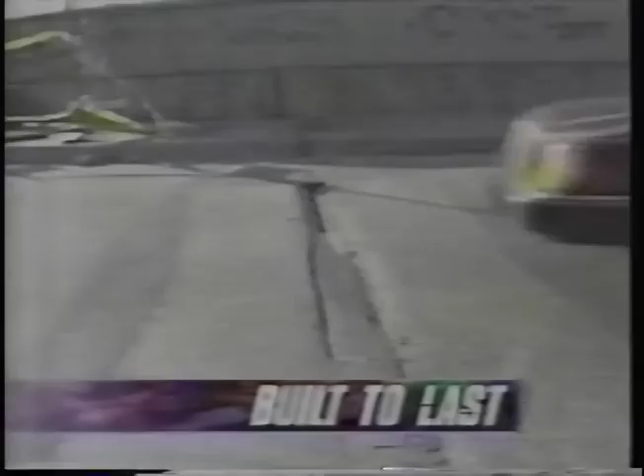Roads and pavements, bridges and support columns. All of what's called America's infrastructure is slowly crumbling because what it's made of does not last. This is ordinary concrete, and this is what happens to it after years of punishment. It falls apart. Most of the concrete in the nation's highways and bridges has a life of just 30 years.

What's the solution? I'm standing on it - brand new stuff called high-performance concrete. This is a sample. Engineers say this will last not 20 or 30 years, but 100 years, maybe longer. This is what America's roads and bridges could be made of in the future. Engineers at the New York State Department of Transportation discovered how to make it 2.5 years ago. We were surprised when we actually did all the calculations and got the test results back and said, my goodness, this really is going to work.

Researchers stumbled on the formula after the Clean Air Act forced power plants to reduce pollution. Huge quantities of industrial waste called fly ash began piling up, collected from smokestacks. At first used as a filler in cement, it turned out to be a key ingredient in strengthening it. So this is 1/4 industrial waste. But it makes the cement many times tougher. That's right - high-performance concrete is 74% cement, 20% fly ash, and 6% microsilica, another type of ash, all mixed with water.

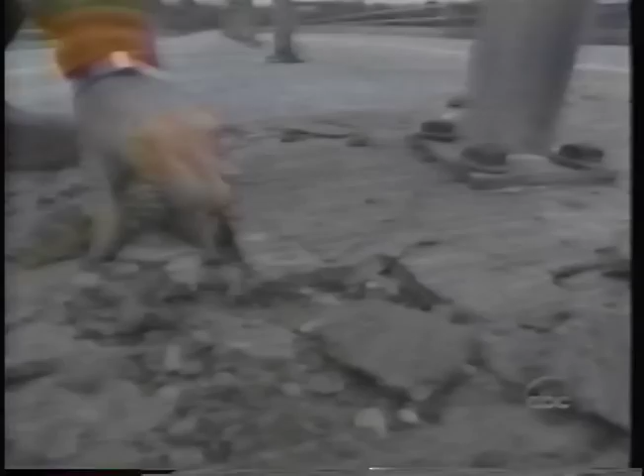When it dries, ordinary cement is actually porous, not solid. That's how salt and water get in. But the fly ash and microsilica are 10 to 100 times finer than talcum powder. Professor Ken Hover of Cornell has found they literally fill in the microscopic holes in the cement, and demonstrates it with colored tennis balls.

So the next thing I would want to do if I want to densify this box is get some mid-sized particles and try and get those into the box. They fill in all the smaller voids in between the cement particles, and we just have a very, very dense material. More waterproof? Correct. Stronger? Yep. Lasts longer? Yes. The new concrete is 3 times more water resistant, 20 times less likely to form cracks, and in pressure tests measured 9,060 psi - almost 20% stronger than regular concrete.

However, modern scientists were not the first to make high-performance concrete. The ancient Romans were, mixing volcanic ash with their cement to make it far tougher. It's one of the reasons the Colosseum and other Roman buildings have lasted so long. We really literally reinvented what our ancestors 2,300 years ago had already done. At least 11 states are following New York's lead. High-performance concrete is more expensive than ordinary concrete, but because it's easier to lay down, it costs about the same to use. Engineers say not only could it be an answer to much of America's infrastructure problems, but it could revolutionize all construction. Jack Smith, ABC News, Albany, New York.

That video was actually recorded February 11th, '97, so 6 years ago. They showed a map that only had a few states that had used high-performance concrete on their bridges. As of last year, all 50 states have used high-performance concrete on their bridges in one way, shape, or form. New York and Ohio were probably the first two to come on board full stream - the fellow at New York, Don Streeter, was saying that they had only come up with it back 2 years before '97, which was '95.

Reality is they did their first overlays and bridges in the mid-80s, likewise Ohio, and then they watched them, monitored them, tested them, looked at them for another 5 to 10 years until they really got the data back. They looked at the numbers and they're really going to work out. They know they're going to get extra life out of these structures.

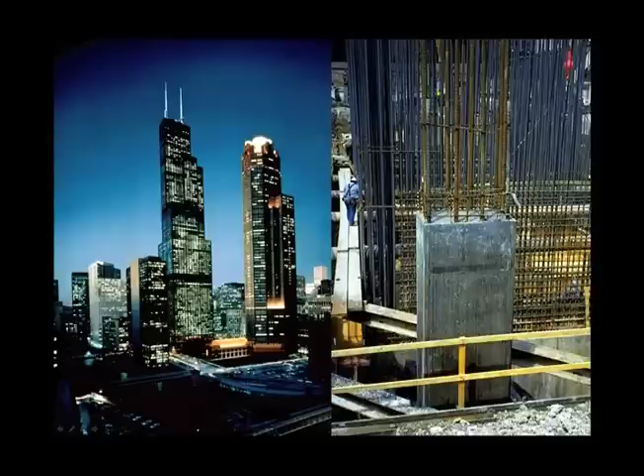If you think about it, it stands to reason: if you were to make a column out of 4,000 PSI concrete to support this weight, the column would become very large to support that mass of dead weight. If you make the column 12,000 PSI with a higher modulus of elasticity, the column can become a lot smaller — not only smaller, but using less steel. And if you've got 20 of these columns going up through the whole building top to bottom, you save 35% square footage on every column times 20.

They lease the building based on square footage. So if you can reduce that column size — if there were no columns, Donald Trump would love it because then he could rent out the whole floor. The idea is to make the columns as small as possible with as high strength as possible, which gives the owner more to rent and lease out, so they make more money off of it.

High strength in Chicago, 12,000 PSI. Right now, Trump Tower is going in at 16,000 PSI concrete. They have a modulus of elasticity requirement - they actually didn't require strength, they required a certain modulus of elasticity out of the concrete so that the building would stay rigid enough. They have an equation where if you live on the top floors, you shouldn't be able to feel the building sway more than about 1 time in 30 years. They go from that measurement back to how strong the concrete has to be in order to keep the building that rigid in the 200-mile-an-hour winds they get in Chicago sometimes at those elevations. So it's a crazy calculation, but they're up around 6.6 million modulus of elasticity, which is really high.

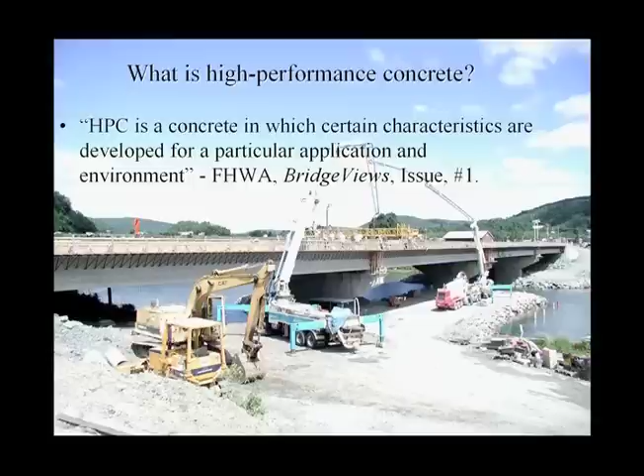That's just one property of high-performance concrete. The FHWA says that high-performance concrete is a concrete in which certain characteristics are developed for a particular application and environment. The operative words there being 'certain characteristics.' Concrete can have a lot of different characteristics.

High strength is one. Right now, in the construction industry, one of the big things in concrete is art concrete, stenciled concrete. You have some pavements out here that are stenciled to make it look like bricks - it's actually concrete, they throw colors on it. You go to some hotels, they'll have the drive areas to look like specialized stones with colors on it. That's actually a high-performance concrete. They're doing something other than making a gray slab on the floor - they're getting something out of that concrete.

Here's a list of what the FHWA says are some of the HPC characteristics. It can be ease of placement - you ever heard of self-consolidating concrete, SCC? That's probably the latest thing in the last 5 or 6 years in the concrete industry. They've got certain chemicals, and silica fume can be used for that application, but they're able to make a concrete that flows like water, but it doesn't separate from the aggregate. The aggregate and the mortar and everything moves in unison.

So, anybody work with concrete? By hand, actually wheelbarrowing it and putting it in, or what type of work? Actual finishing? Okay, you know how heavy it is to pull the concrete around - it's back-breaking work to do.

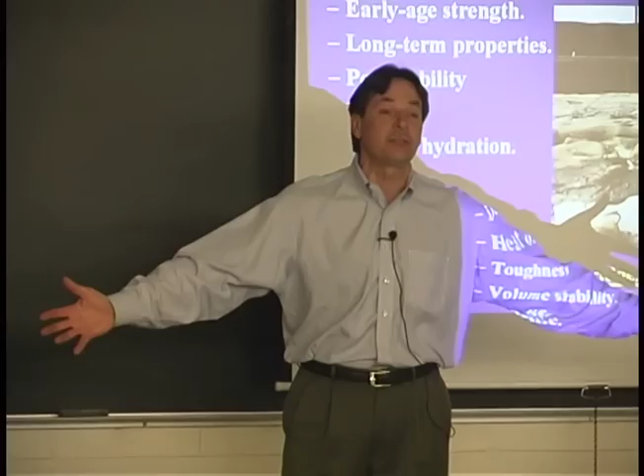SCC concrete, particularly in a precast plant where they're filling up concrete in forms, or even in houses where they're filling up basement walls - SCC concrete, they can place it at one end of the form and let it flow like water to the other end, and the aggregate will stay with the leading edge of the flow. In a precast plant, they've cut labor probably 80% in the last 6 years. They don't have to vibrate the beams, and they get much better finishes on their concrete.

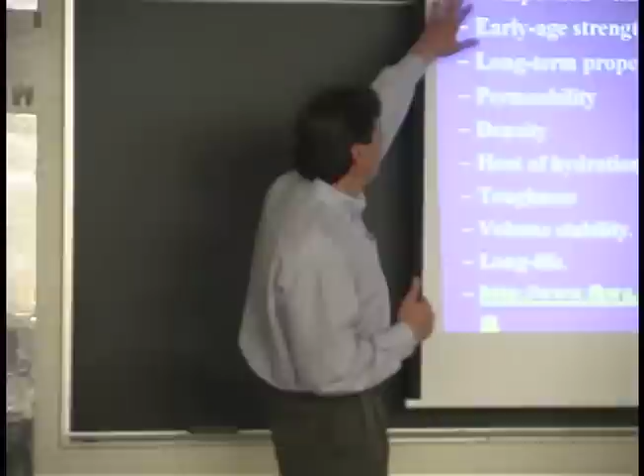But that's just one area of what would be a characteristic for performance. Early age strength - if we wanted to fast track, rebuild an intersection, get on it and off of it in 4 hours' time, you can do that. There's concretes you can tweak that characteristic and make it happen. The idea here is to make engineers think, when we talk about performance, that there's more you can do to concrete besides just achieve strength. Strength is just where everybody's head has been for the last 100 years or so - if a little bit is good, a lot has to be better.

But there's other things that make concrete fail, not just strength. In this case, we're looking at a stilling basin of a dam, that we'll show a little video on here, where the concrete was obviously eroded away by abrasion erosion. That needs a concrete that has extra toughness - that's a performance characteristic that you need that can be improved.

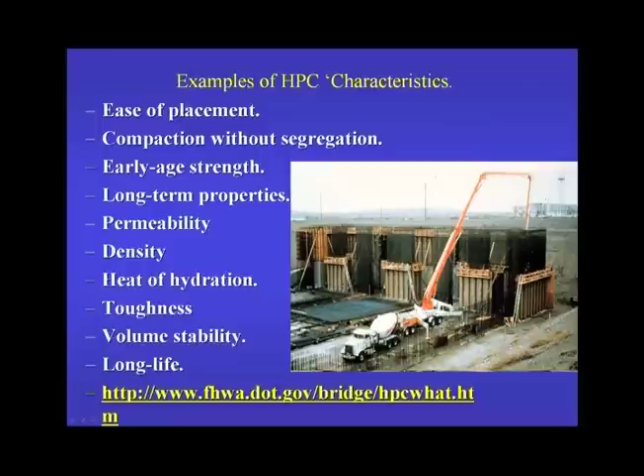If you're making containment vessels for low-level radioactive material - this is the Hanford nuclear site in Richland, Washington, with a 12-foot thick slab or walls of concrete here - they're worried about heat of hydration. When concrete gets hard, changing from its wet state to a hard state, it generates heat as part of the chemical reaction. In that big mass of concrete, in big thick walls like that, concrete can get pretty hot. If you have a core differential temperature from inside that slab to the outside that's greater than 35 degrees F, it'll crack. They obviously don't want this to crack because it's supposed to last a couple hundred years containing radioactive material, so they want it to be very volume stable with low heat of hydration.

They don't want to generate a lot of heat. They want the concrete to still get hard and last for a couple hundred years, but they don't want it to hit 160 degrees when the outside environment's 50. So there's things they can do to the concrete to make that work.

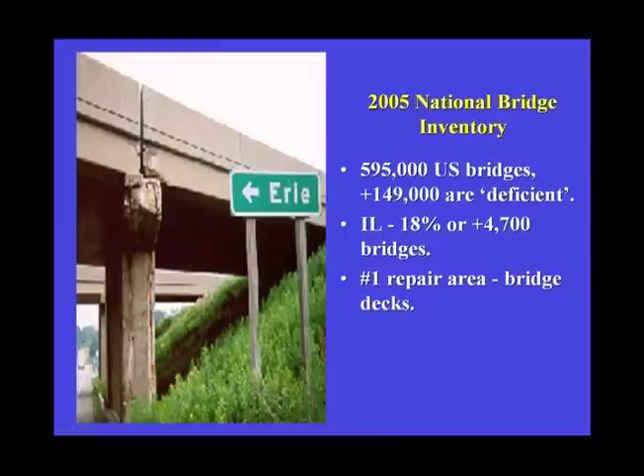It's not just driveway concrete, or to make longer life. That's where the FHWA spends most of their focus - how we get our bridges, as we heard in the video, to last longer. The last inventory in 2005 said we had just short of 600,000 bridges in the United States - these aren't culverts. They had a certain length that would actually make it a bridge. It's not just the culverts over the little creeks, it's a physical bridge.

Of those 595,000, about 28% are rated deficient - either because they're under capacity, structurally deficient, or falling down. This bridge right here is in that category. There's a lot of bridges like that in Pennsylvania, not just at Erie. But in Illinois, we're down to 18%. The national average, remember, is 28%. So Illinois has done a great job in the last 10 years of cutting that number down, because the original number was up around 240,000 ten years ago. A lot of states have done a good job knocking the number down, and Illinois is one of them.

Illinois has been using high-performance concrete. The first overlay was placed here in 1986. State Route 4 crossing I-55 is the overlay. It's still in place. They only expected the overlay to last 10 years, and we're up to, what, since '86? 20 years - so they doubled the life out of that overlay. An overlay was put on the bridge because the bridge was rated as deficient.

Most of the bridges fail because of chloride attack through the surface of the bridge, getting into concrete, which acts like a sponge, sucks up the water, sucks up the chlorides. Once you get enough chlorides into the concrete at the layer where the steel is, corrosion is actually an electrochemical reaction - you need an electrolyte to carry the current through the concrete. It's the chlorides, the negatively charged chlorides in the concrete, that act as that current.

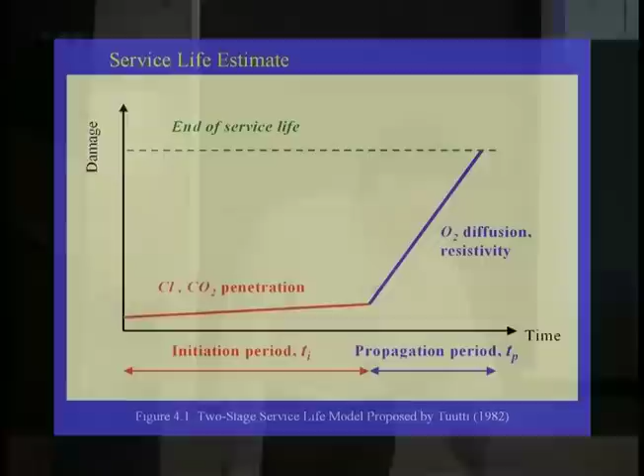Outside parking garages, yeah. Yes, I think it's actually like 8 or 10. No, that's cool. But what does service life mean on something like a parking deck or a bridge?

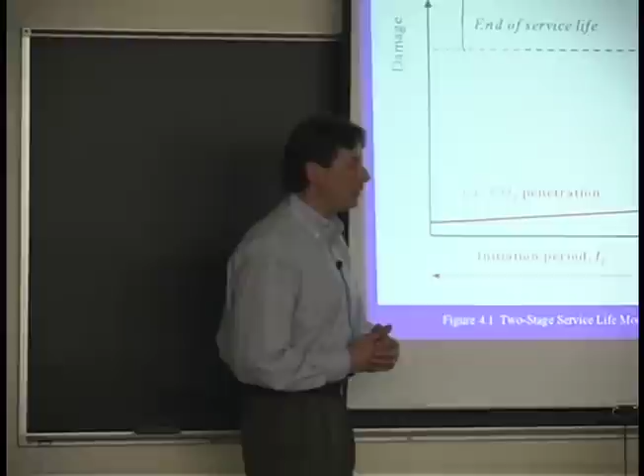This is a famous way of depicting it from Professor Tuutti back in '82. Concrete acts as a sponge - that's this initiation period here, where it's allowing chlorides and carbonation to actually penetrate and get into the concrete. There's no corrosion happening at that point in time. It takes a certain amount of electrolyte in the concrete to start corrosion - that's where corrosion starts, and then as it corrodes, when steel corrodes, it effervesces and swells, to 4 times its normal size. Although concrete's real strong under compression, it's real weak under tension, and the expansion of rusting steel is a lot of force when it swells up to 4 times its size. That causes the concrete to break. Once the concrete breaks, more water gets in, more corrosion, freeze thaw - you get potholes happening very quickly.

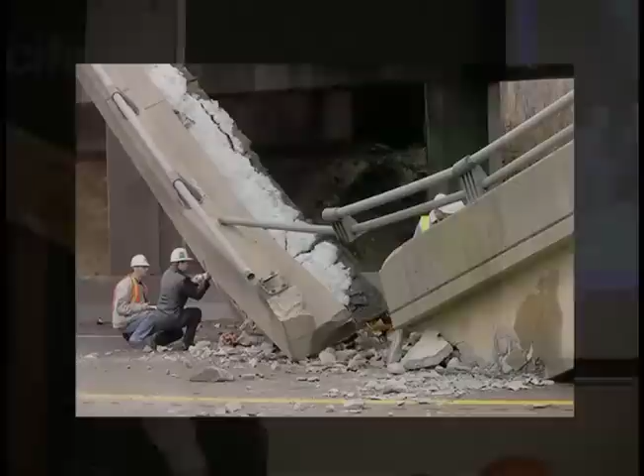That's the propagation period. The one bridge with the sign pointing to it was in this part of the equation of its service life, way beyond the initiation phase. But when do you pull the plug on a bridge? When do you say it's done? Well, that one's done. That happened a month ago.

About 20 miles from my house, crossing Interstate 70. Luckily, no one was hurt. The bridge is 40 years old. The reinforcement was completely rusted through. It's on the shoulder, so all the salts and water run to the edge of the bridge where the gutters are. That's where the salts got in. They lost all the steel there.

There was no traffic on this at all. It fell down under its own weight. This bridge was rated deficient. It was scheduled to be repaired. Well, it is now. But there are two other bridges built at the same time on either side of this one. PennDOT has since shut down both of those, and I think last week they actually blew up this one. So some states learn by taking it out of service before this happens. Sometimes the end of service life can be pretty dramatic.

Without the steel in the concrete, concrete is very brittle. It'll break like a pencil. That's why you have reinforcing steel in concrete. Steel's real good in tension, concrete's real bad in tension. So if you put those two together, you get them both working together. But obviously the steel in this case was completely corroded through, so it was acting like a pencil. The weight, just the weight of the bridge itself, the concrete couldn't carry it without the steel.

It happened overnight, around 5 in the morning when it went down. This happens in parking garages all the time. Bridges are more catastrophic because of their potential, but Minneapolis is famous for having parking garages fall down for the exact same reason, that the salts corrode through the reinforcing steel and there's nothing left holding up the structure other than a concrete pencil, and the pencil snaps. That was in Pennsylvania, Interstate 70, just south of Pittsburgh.

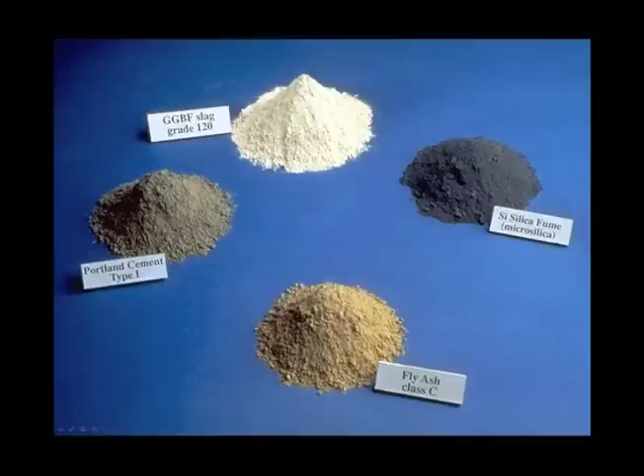How do we make high-performance concrete? Well, concrete, real simple, is two ingredients: it's glue and it's the aggregate. The aggregate is your sand and your rock. Normally that's something that happens locally, that you get out of the ground locally, and normally it's the best material that you have in your concrete. If you think pragmatically about what happens with concrete, people complain that it cracks.

It has carbonation, it has conductance, it takes in chlorides, it scales, it has creep, it has delayed ettringite. All these bad things happen to the mortar, except for alkali silica reaction, which could happen from your aggregate, but that's something we know how to take care of. Normally the aggregates are the best things you have. So you're dealing with mortar and you're dealing with aggregate. Those are the two things you're going to put in concrete. These cause you a lot of problems if you don't do it right. This is the good stuff in the concrete.

So real pragmatically, I want to use more aggregate and the least amount of cement that I have. I want to make it the best glue that I can possibly make it, but I don't want to use a lot of it because a lot of it gets me into trouble. That statement alone is almost 180 degrees different than what everybody thought in the last 50 years in the concrete industry. You got a problem with your concrete, put more cement in it.

No. If you add water to these three things, slag, Portland cement, Class C fly ash, they hydrate. What that means is they react. Chemically, they react with the water and become something different. Like baking a cake, you put flour, milk, and sugar together and bake it, it becomes something different. Well, likewise, when you put cement with water together, the cement starts reacting with the water and it starts growing crystals, and the crystals interlace, and that's what makes the strength. Slag does the same thing, Class C fly ash does the same thing also. They hydrate.

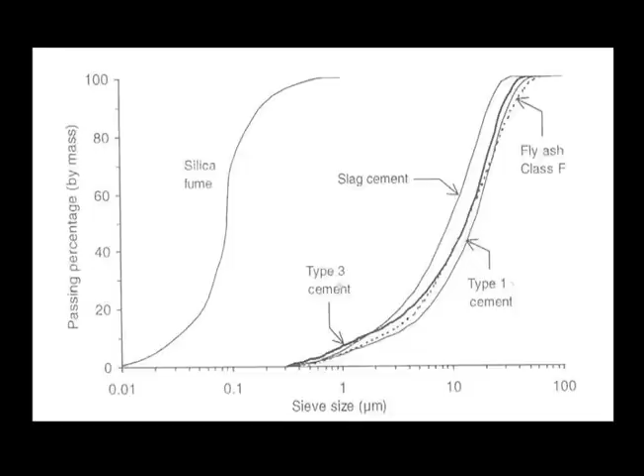Slag, fly ash, two different types of cement, they all basically have the same particle size distribution. If you look at the D50, 50% of the particles, the D50 is probably about 12 to 13 micron, somewhere out there, 10 to 12 micron. The D50 of silica fume ends up being about 0.1 micron. Very, very fine material, 100 times finer than cement grains.

He's asleep, I was going to throw it to him, but here you go. That's actually silica fume, a full container of it.

If you think of the word silica fume, fume in Latin means... anybody? Close. No fumada, like in a restaurant bathroom, no fumada. No smoke. Fume is smoke in Latin, or French, Italian. And it actually is silica smoke.

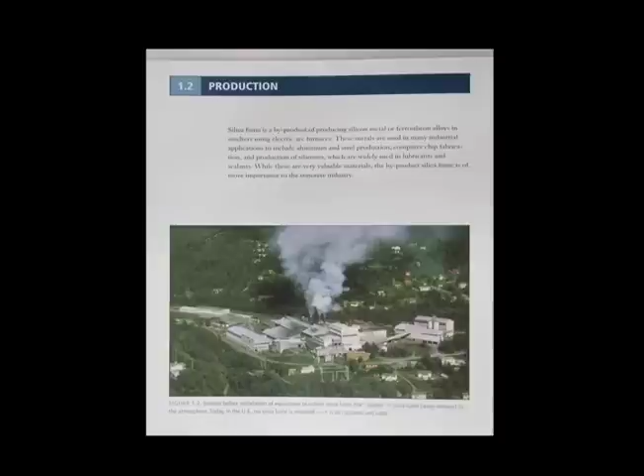That's captured smoke. You can open up the container and look at it, it's fine. It won't jump out, it won't float away. You throw it in the air, half of it will probably stay in the air, but as it's captured, this smoke weighs about 8 pounds a cubic foot. Water weighs 62.4. This weighs 8. It's captured smoke, literally.

The plants used to look like this. Obviously this is taken out of the user's manual that you have in front of you. That manual is written for producers and practitioners of concrete—ready-mix producers, contractors. It's not an engineering document, it's a real how-to. The first couple chapters deal with the background, like this is actually in chapter 1: what is silica fume, where it comes from, all those things we're going to cover here real quickly.

Latter parts of the book, chapter 6 deals with mix designs and proportioning. Chapter 8 deals with contractor issues of placing and finishing. So it's all written this way because the FHWA wanted a document—we have enough engineering documents on high performance concrete. We needed something to take from that industry back to the people that actually have to build with it, and teach those people how to build with high performance concrete. That's what this manual is dedicated to. I think it's perfect for what you guys are headed for.

If you put one spoon of this material in a cup of water, what will happen? You'll have dirty water. You can actually mix it in with water.

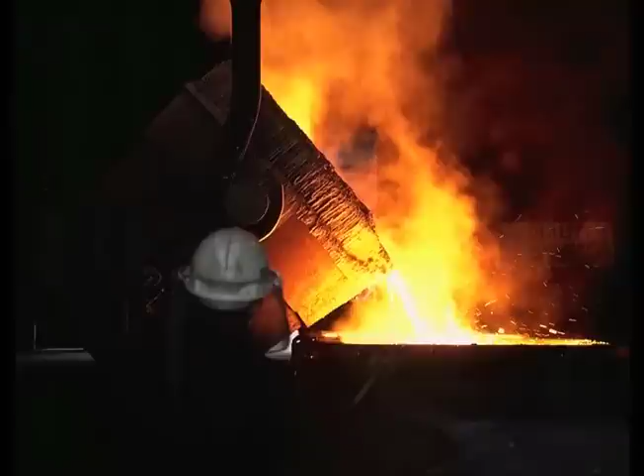This is what it looks like coming out of the ladle. The hot silicon metal is poured into chills, and that's exactly what it does in these big flat slabs, is chill. Then they drop it on the ground, and it shatters like glass, which starts the crushing process. They crush it to that size, and they'll take it even further, from that size all the way down to 10 micron, which is pretty damn fine. They use that in ceramics.

This is the silicon metal coming off. This is the silica fume going up the stack. As it comes off the silicon, it's all gas, SiO gas. When it hits about 600°C, it combines with another oxygen and forms SiO2, a solid. So you get this precipitation from a vapor to a solid, like the formation of a rain droplet. That's how the material ends up being so fine. Remember, we said it was 100 times finer than cement grains. It's captured smoke, is what it comes down to.

That's a question that always comes up because of the name silica, and maybe these next couple of slides show it better. This is another example trying to give perspective on what we're talking about here. If a cement grain, one little piece of cement powder, were the size of the Washington Monument, silica fume would be the size of a 6-foot guy. That's the difference in size.

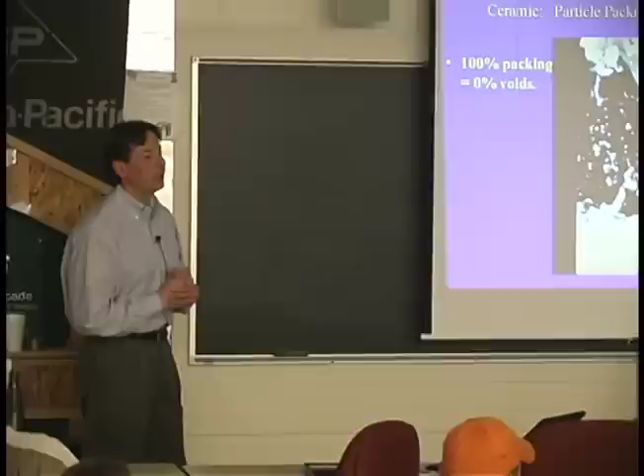Yeah. Right, because you've put something between those baseballs. Otherwise, you could pour water through it pretty easily - it's just physically blocking the pores.

That's what the ceramic people do with their particle packing theory. Their theory is if they get all the particles graded just so, when you squeeze them all together, there's no room - it's 100% dense. That's why you get some little ceramic parts you put in your hand, they're this size and weigh 3 pounds. They're just so densely packed together with particles. And that's what we're trying to do with concrete.

If you think about it, that's what we do on the aggregate side. We start off with big aggregate, mix in a gradation of aggregates and then a gradation of sand, so that when you put all those things together, they fit together very nicely and you can use very little cement, very little glue. So all we're doing now, instead of grading the aggregate, we're grading the powders, grading the mortars - finding something to fit in that finest fraction between the cement grains.

But you still will have some permeability, yes. Yeah, it's not waterproofing - it's not waterproofing. You're still getting a little bit through, but it's less permeable compared to if you did nothing.

And what... what's the difference?

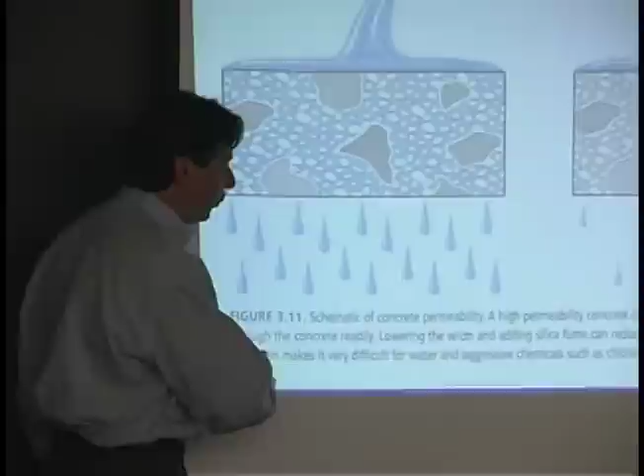As they're saying here, the common thought before using pozzolanic materials for particle packing was that the best you could do was lower the water-cement ratio. Use the least amount of water, and you get lower permeable concrete. That was always the trend—if you wanted low permeable concrete, you made low water-cement ratio concrete.

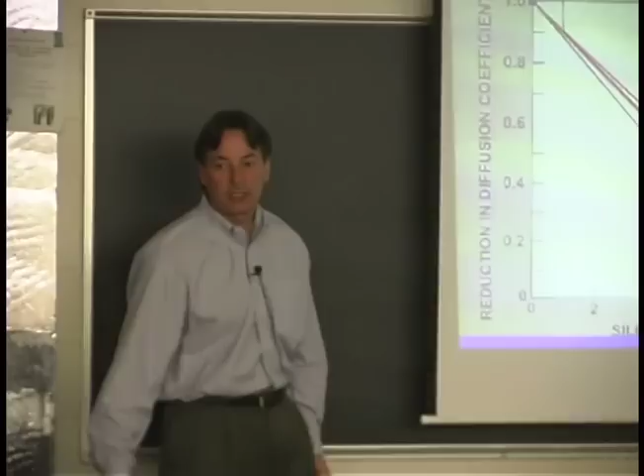What the next slide shows is that's not necessarily the whole story. You do get lower permeable concrete at a 0.35 ratio, which is pretty low, but by adding a portion of silica fume, replacing the cement with even 7% silica fume, you can get somewhere around 60 to 80% reduction in permeability, even at a real low water-cement ratio concrete.

All those different values there, 1202, those are all different permeability tests that people run on concrete. This is just a way of comparing all these different test methods, showing they more or less show the same thing, the same type of trends.

So it takes very little of this particle packing to get the biggest impact. As you see, you have a point of diminishing return here at about 7%.

From here on out, as a cement replacement, you're only producing strength. If strength is your goal in a high-rise building, you may be up there at that dosage. If you're doing a parking garage or a bridge deck, you probably don't need strength. You're looking for this though—a reduction in permeability to keep the chlorides out.

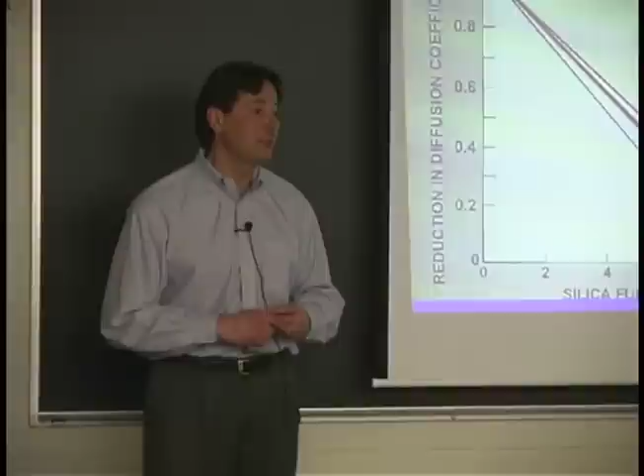Or a loading dock, an industrial floor, a chemical plant, a sewage treatment plant, or anywhere you have an aggressive chemical that's going to get into the concrete, because all concrete is a sponge. You're looking for durability in that case.

Yes, at one count—and it was a couple of years old already—there were 200 different companies in the United States that sold chemicals for sealing concrete. Everything from Thompson's Water Seal to some pretty sophisticated stuff that 3M makes. There's 200 different people that make chemicals to seal the surface of concrete, to make it last longer.

If any worked, wouldn't it put somebody out of business? But what happened is they all fail in time. They all wear off. They fail either because of wheel traffic, UV exposure, freeze-thaw, or something. They're all superficial treatments, whereas what we're talking about here is actually making the concrete right.

You're making the concrete when you have a chance to do it right the first time. You can make it real low and permeable from the get-go, and get longer life. That's exactly what they're trying to do.

One way of looking at this is a life cycle model. This Life 365 model is software that we helped pay for with Grace and Master Builders. It's actually an ACI document—ACI 365 is the committee that deals with predicting service life.

What this model allows you to do is build a structure, put it in a various part of the United States, build it with different types of concrete, turn the crank, and it'll tell you how long it'll last and how much it cost to last that long. Let me show you how that works.

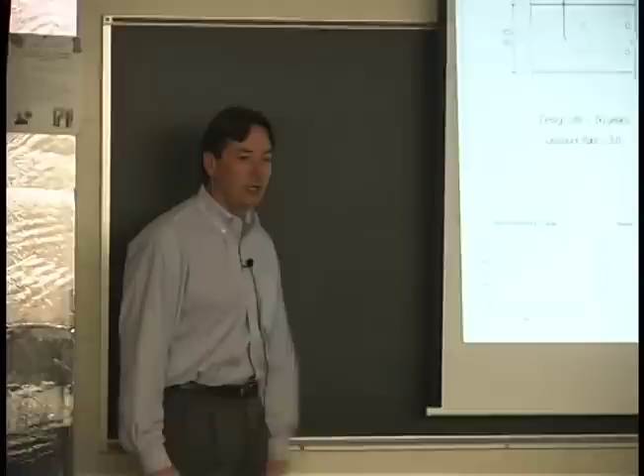The model knows the surface chloride chemistry for, in this case, Chicago. I didn't have one for Charleston—the nearest other place, I think, was Springfield, so I picked Chicago instead. It also has the temperature history per year, so it knows how much salt is going to hit that bridge.

In this case, we said we want our bridges to last for 50 years. In this particular case, that was the design life.

The one video we saw from New York said the original interstate system, when they started it in 1956, the average bridge lasted 35 years, which was great at the time. When they started building the interstate system, they didn't have 18-wheelers—they didn't have 80,000-pound trucks running down the highway, pushing over 100,000 now.

And they didn't have as many trucks on the highway back then. They probably had maybe 2% of the 18-wheelers back in 1956. You didn't have the highways to carry them. The roads were windy 2-lane roads, so you didn't put big trucks on them because they weren't feasible. There weren't any 18-wheelers back then.

So even though they tried to design those bridges with as much safety factor as they could, the guys who designed the interstate system had some idea of the impact it was going to have on our economy, but it was only about half of what it actually had. Now we know that if we do it right, we have a second chance to redo our bridges and make them last 50, 60, 75 years. They won't last forever, but they'll last more than we got out of them the first time.

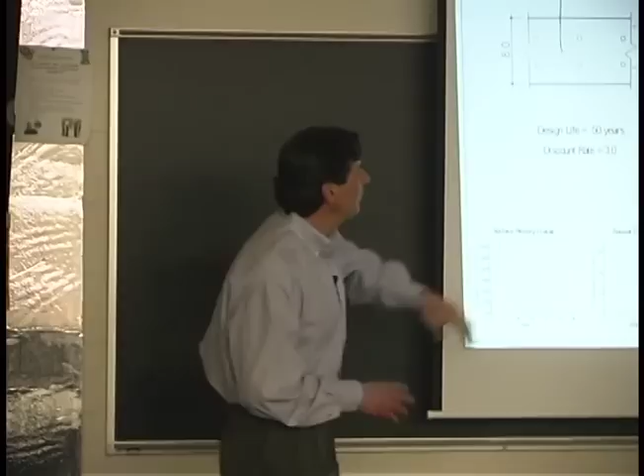A yard of concrete up in Chicago - that's probably light, probably closer to 150, but I put 120 bucks. The model knows that for this water cement ratio concrete, there's a certain diffusion coefficient built into it. It has a certain permeability - that's the permeability number. It takes a certain amount of chloride concentration at the steel, 2 pounds per cubic yard, to start corrosion.

So we've got to get 2 pounds of salt per cubic yard down to the steel in order to start corrosion. We're going to put epoxy coating on our steel to try and keep it from corroding. It's an electrochemical reaction - the epoxy coating is like rubber coating this wire. You're coating the steel with a layer of non-conductive material to try and keep electrical current from hitting that rebar, that steel. That's all it does.

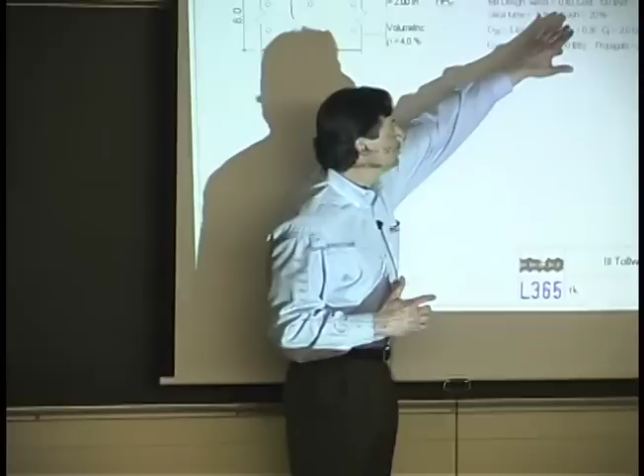It'll still start corroding when you get to 2 pounds per cubic yard of chlorides, but it'll corrode at a much slower rate. Black steel without epoxy coating will have a propagation of only about 6 years before the structure really falls apart bad. But epoxy bars will buy you about 20 years of life in that propagation part of the model. We had that initiation part and the propagation part - it's buying us extra time in the propagation part.

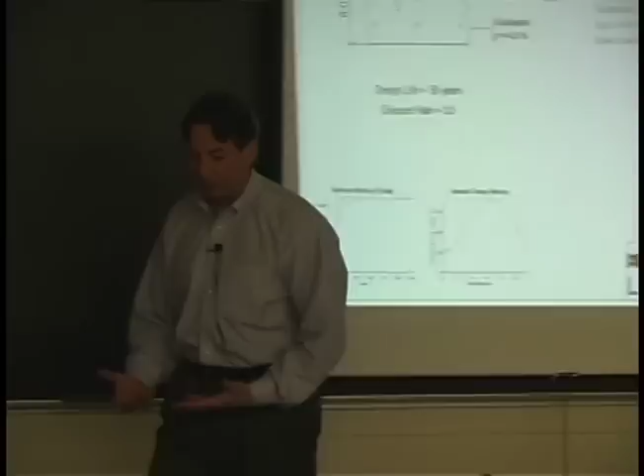The high performance concrete uses the same water cement ratio, a little extra higher cost. We put silica fume and fly ash in it, which had a big effect on the diffusion coefficient. We're still going to corrode at the same amount of chlorides if we can get them in there, and we're using epoxy bar. This is what they're actually doing up at 294.

When we turn the crank on this model, it says the base case is going to achieve our 2 pounds of chloride in 6 to 8 years of normal use. Normal use in that area is that they throw - I used to have a bag - 6 pounds of salt per square foot per winter. That's how much the DOT figures they actually throw on the 294 bridges over the course of a whole winter.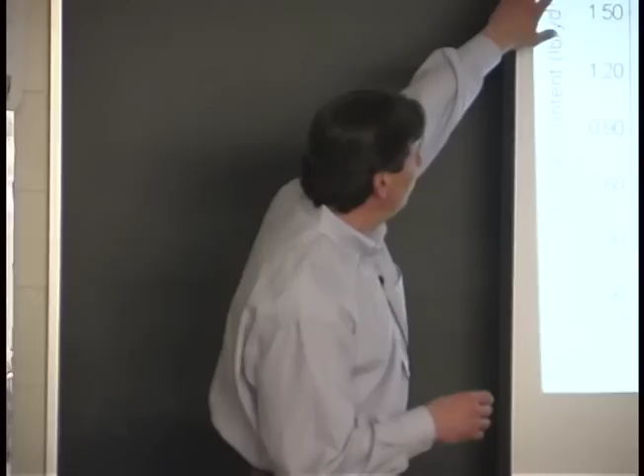That's a lot. In the case of the high performance concrete, to get that same 0.2 factor, we're out here 20-some years, 24 years plus.

If we turn the crank on this and actually run the economic model, we see that going in place, the initial cost of the high performance is a little more expensive according to our model. But easily, if we have corrosion that's not going to happen until 27 years versus 7 years, and we put epoxy on top of it, we're going to last 47 years before we have to repair that bridge, versus half as much, versus 27, according to this particular model.

We could tweak it, do other things, and make this bridge last 100 years. We could use more cover, toughen up the mix, various things. In this case, the goal was 50 years, which is what they achieved - that's what they wanted to afford. They're not worried so much about this thing lasting 100 years. This is in Chicago - they know they're going to overcapacity it before they get to 50 years.

They just want it to last that long so that it doesn't fall down. They'd rather it be obsolete because of capacity, not able to carry all the vehicles they're going to be driving around up there in 50 years, but to have it last without repairs.

Okay on this? Make sense a little bit? In the manual here, as y'all can read, this manual is not for engineers. It's for contractors and the people in the field actually doing the work.

Silica fume and this type of technology, we heard it's been around for a couple thousand years, and it's been in this country since the mid-70s. I've been doing it since the early 80s, but there's still a large group in the construction industry that hasn't really embraced high performance yet. Sorry to say, it's the people that actually have to do the work. The engineers, the designers, the owners, the FHWA, the DOT and everybody else, they know what this can do. As they said 9 years ago, we know the numbers work, the models work. Now we have to get people to do the right things.

It's a little bit different than regular concrete. We've seen some of the differences here in particle packing and those type of aspects. What does that mean to the constructor? What does that mean to a ready mixer? What does he have to do differently with the way he's been doing business for the last 30 years? How does that change his life? That's all covered in this manual. That's a real how-to. It's written to that audience.

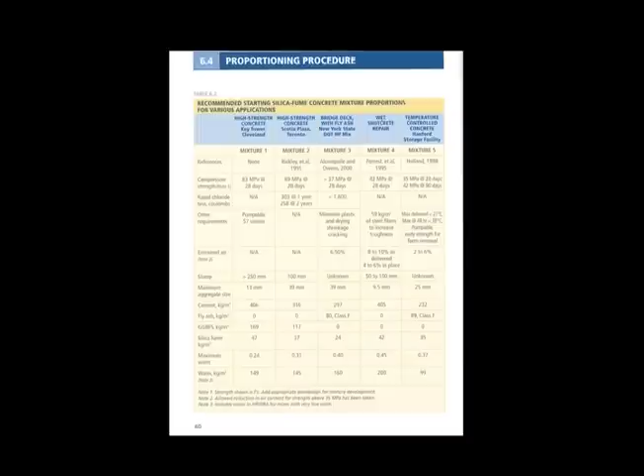It tells you how to set up your batch plants. If you're proportioning concrete, there's a very long, elaborate, formal engineering way of doing mix designs. Or if you have a good mix design that you know has already worked, use that as a starting point and just tweak it into your own. Again, technology transfer—don't reinvent the wheel if you already have structures that work.

In this case, table 6.2 in the manual is actually 2 pages worth of mix designs that, across the top, gives you where it was used. A high-rise building, columns. Another high-rise building. A bridge mix in New York DOT—it's actually the mix that was on the video. A shotcrete mix, if you want to use silica fume shotcrete, here's a starting point of a mix design. The Hanford nuclear site, low heat of hydration mix designs. There's parking garages and a couple other mixes. Those are all starting points so that you don't have to reinvent the wheel.

Because this is an FHWA publication, that table's all in kilograms per cubic meter. But if you go to the back of the book in the appendix, all the tables are in pounds per cubic yard. They're all in our language.

These are mix designs that have been published in technical papers. All of these structures that are listed here have all been documented, discussed and studied, and so yes, the mix designs are all in public domain. They're only starting points because you have to incorporate your own aggregates—your own sands are going to be different, the limestones or gravels are going to be different. You have to tweak your mix design for your own materials anyhow. These are just starting points so we don't have to start over from those very laborious engineering practices of coming up with a mix design. We already have good ones—let's start with these and just tweak them.

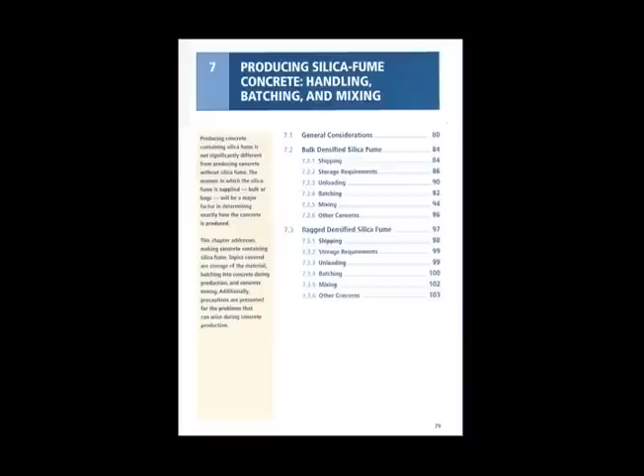Producing it at a ready mix plant, there's a chapter on that, chapter 7 here. Setting up silos to handle silica fume is a little bit different. We saw the material is obviously lighter, and we found out there's another property to the material that is pretty unique.

It has an electrical charge—well, not an electrical charge, more a magnetic charge—that happens to be at the opposite end of the spectrum as steel. So if these pipes, from blowing it from a truck and blowing it into a silo, blowing it through these small confined spaces, we found that if you blow it through steel, it has a tendency to want to stick to the walls just from this magnetic attraction. And once it starts sticking, it just builds up on there.

They found that rubber and silica fume are at the same end of the magnetic spectrum, so it's like two negative poles repelling each other. You can blow it through rubber all day long and it never packs up. So one of the little tricks here in setting up a plant for handling this material is the guys have to get rid of their steel pipes.

Rubber works better. The material is also used in bags. Some of these bags are actually repulpable, which is what they're doing here, allowing you to just dump the whole bag into the concrete truck. The paper is designed to shred up with the aggregate, to beat it up and dissolve back into cellulose fibers. It doesn't dissolve, it repulps. The aggregate beats the paper back into its cellulose fibers.

And it doesn't work on all mixes. If you're dealing with overlay mixes where the aggregate is real small, half-inch aggregate, pea gravel, number 8s, those type of things, the aggregate probably isn't impacting the paper enough to really do the shredding. So the manual goes into great detail of what mix designs these bags can be thrown into, or some mix designs for overlays where you may have to dump the contents into the back of the mixer. But it comes in bag form, it comes in bulk form.

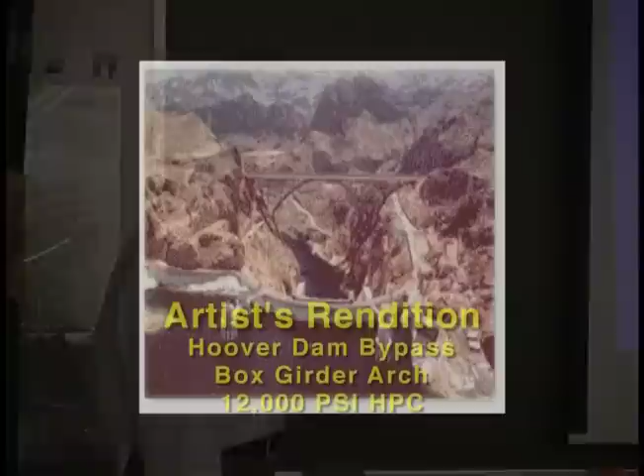Some of the sexy applications for silica fume concrete - this is under construction right now. This is actually an artist rendition of the Hoover Dam and a bridge they're building below it. I don't know if anybody's ever taken a tour of the Hoover Dam outside Vegas.

The road comes down US Route 93 and weaves its way back up this side, goes right across the top of the dam. The visitor center's over here, the parking garage is here, and the tour lets out here, and people are on this highway. There are 18-wheelers that cross this - it's like driving 18-wheelers through recess in a schoolyard. There are people all over this bridge all day long taking a tour, and the trucks have to snake down this canyon and across it and back up the other side at about 15 miles an hour.

Plus now there's the 9/11 terrorist threat. The idea is to get all that traffic off the bridge, not just for safety reasons, but for terrorist reasons. This bridge had been designed over 30 years, but after 9/11, it's being built real quick.

The columns in that bridge - another artist rendition - the box beam here, and the concrete going up to this is going to be a steel bridge with asphalt decking, but all of this concrete here is all silica fume concrete, 10,000 psi, actually 12,000 psi silica fume concrete.

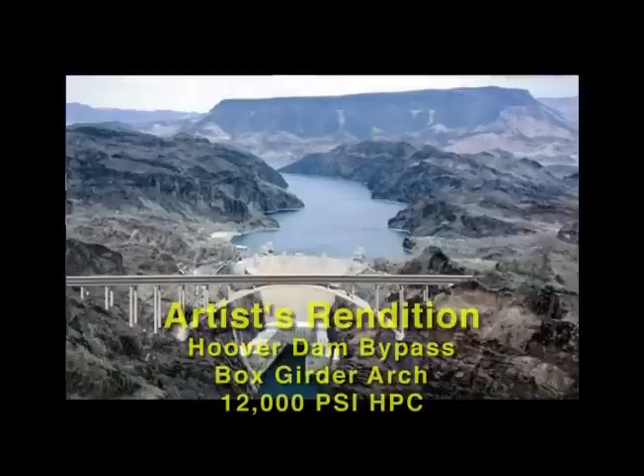There's another artist rendition of it. They've gone to great lengths, because of where it is and that it's going to be photographed quite a bit, to try and make it blend with the surroundings as much as they could. That's probably over-exaggerated. The website here is pretty cool - you can actually drive across this bridge on the website and see what the surroundings will look like, a 3D model of what driving across the bridge will look like.

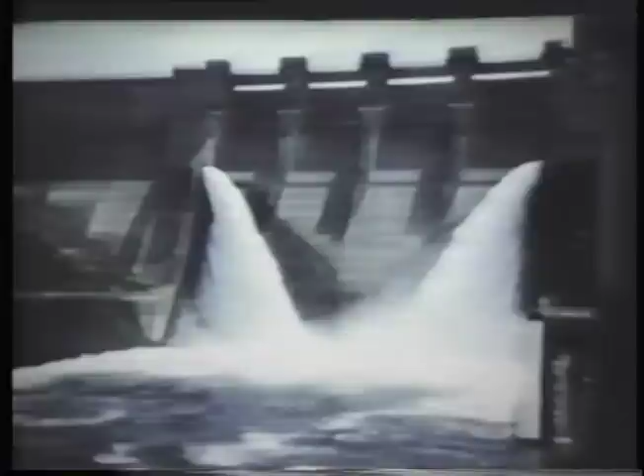Technology Company presents the story of EMSAC microsilica additives and the concrete used to repair the Kinzua Dam's stilling basin. This ultra-high-strength flowing concrete was used to repair the stilling basin at the Kinzua Dam here in the Allegheny Valley in northern Pennsylvania in October and November 1983.

I'm Mark Luther, project engineer for Elkem Technology Company. We're working on this project, repair of the stilling basin of the Kinzua Dam. The U.S. Army Corps of Engineers is the federal agency responsible for maintaining the nation's waterways, and the Kinzua Dam and its stilling basin is one of its responsibilities.

A stilling basin is exactly what its name implies. It stills the water that flows out of a dam before it reaches the main channel of a river or other body of water. If there were no stilling basin, the energy from the high-velocity water would simply gouge out great holes in the riverbed and its banks and possibly endanger the stability of the dam.

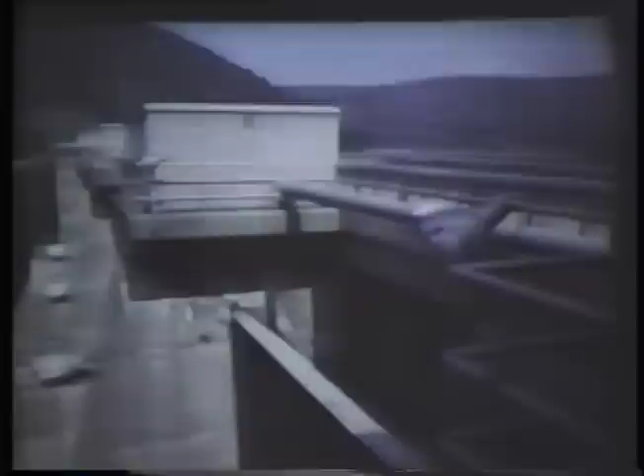At Kinzua, the stilling basin is a large area, about 204 feet wide by 180 feet long, with 5-foot thick slabs of concrete. It was originally placed in operation in 1966 and was made of good quality concrete with 6-inch sized aggregates. By 1973, the combination of high-velocity water flow and the presence of debris in the basin had eroded the concrete surface and caused general erosion, with holes as much as 3 feet deep.

That same year, the U.S. Army Corps of Engineers let a contract to repair the entire slab with a 1-foot minimum overlay of low-slump steel fiber reinforced concrete, the very best concrete then known for this type of repair work. 9 years later, in 1982, underwater inspections by divers showed that in some places, the 1-foot overlay of steel fiber reinforced concrete had been worn away, and as much as 2 feet of the original slab was also gone.

And then over here you see the worst damage. This is where the greatest force from the upper sluice gate number 2 occurs. This is where the water impacts and swirls around and the energy is killed. And as you can see, it's really done a number on the concrete here. Some of these holes are 2.5, 3 feet deep, if not more than that.

Well, as you can see, the fellow with the Philadelphia rod there, I don't know if you can see how deep he is there, but I would say where he's standing right there is over 2 feet deep right now. And what they're doing is taking elevations, using that rod and the level behind us here to determine where the level of this concrete is now so they can determine what they need to do.

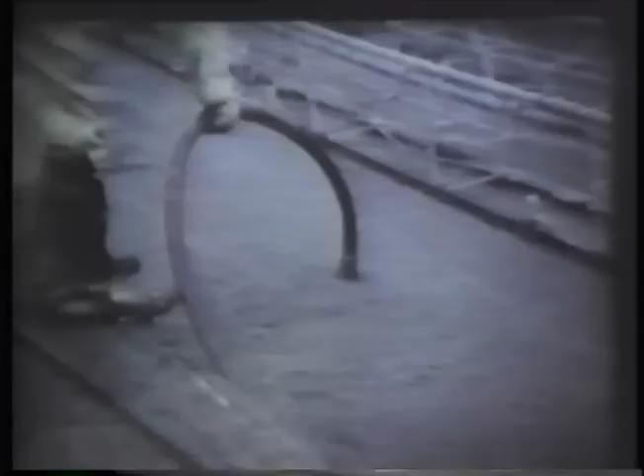Lab tests of concrete produced with MSAC microsilica additives found it to have an abrasion erosion resistance suited for the Kinzua repairs. Through the use of MSAC microsilica additives, it was possible to obtain a strength and denseness that made concrete far more resistant to abrasion than any concrete produced in the United States before.

It has long been known that the strength of concrete will increase dramatically if we were able to fill its pores with a cementitious binder. Concrete with MSAC additives achieves its extreme resistance to abrasion through its ultra-high strength and virtual impermeability. With MSAC additive, it is possible to create these properties and still maintain a flowing and self-leveling concrete.

But first, the Corps of Engineers required field tests at its Neville Island facility in Pittsburgh, using a ready-mix concrete plant operation to prove this concrete could be produced and placed satisfactorily under normal day-to-day working conditions. 3 different concrete mixes with 3 different blends of MSAC additives were batched and shipped from a transit mix plant in the Pittsburgh area. The concrete was rapidly placed and finished.

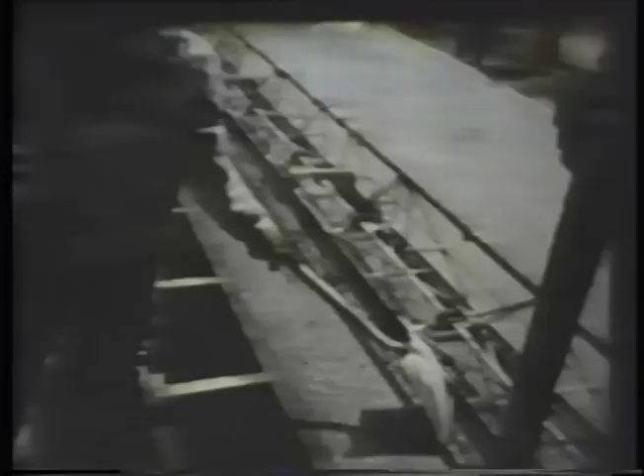Slumps were as high as 10 inches, giving a flowing consistency for easy handling and placement. Membrane curing compound was applied immediately after the final finishing operation. At Neville Island, concrete containing MSAC additives tested over 10,000 pounds per square inch at 7 days and over 17,000 pounds per square inch at 90 days.

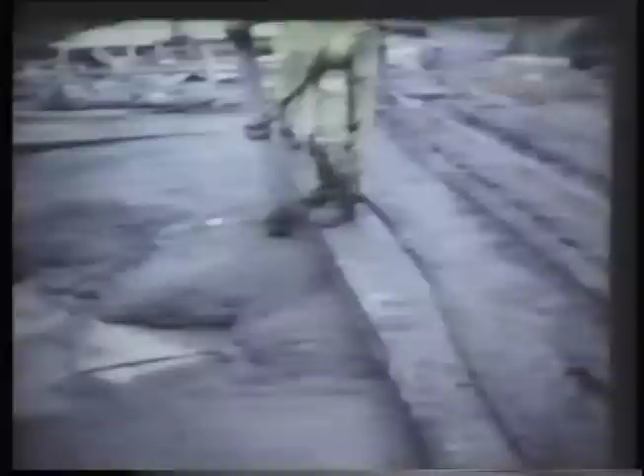In its specification for the Kinzua Dam Stilling Basin rehabilitation, the U.S. Army Corps of Engineers required the concrete to attain compressive strength of 10,000 psi at 7 days and 12,500 psi at 28 days. Slump was required to be from 7 to 10 inches. The contractor is Casey Company of Pittsburgh, Pennsylvania. The concrete was produced by Harmon Brothers Ready Mix Concrete Company in Warren, Pennsylvania.

I can't think of anywhere else in the United States today where they're pumping 10-inch concrete and getting 16,000 psi unconfined compression test results in 28 days. That's what we're doing here. That's one sample we have received. The average is closer to 13,000 psi in 28 days. But you have to keep in mind, this is flowing concrete. Typically, it's a 10-inch slump.

This is Harmon Brothers concrete plant where the 2,000 cubic yards of microsilica concrete will be made for the dam. This site is about 8 miles from the dam. Behind me is the plant where the concrete will be made. One of the advantages of MSAC concrete is you can make it in an ordinary concrete plant, which this is. No special modifications were made to this plant to enable us to make a very high-strength concrete.

Here is Elkem's mobile dispensing unit, used for batching MSAC into the truck mixer preloaded with concrete. The MSAC and the concrete were mixed in the truck before the truck left for the dam. Concrete will discharge into the remix hopper of the concrete pumping machine.

From there, the concrete is transported down to the formwork, where the concrete is placed into the slabs, and there it is put in place.

This is just one way to transport concrete. They had thought about using buckets, but they decided on this job to go with the pump because they get better control and it goes a little faster. Our particular concrete seems to pump very well. Where the remix hopper is, samples are taken from the concrete, and these samples are tested to make sure the concrete has the proper consistency.

It had maintained its ability to flow and to level itself after 8 miles of trucking from the ready mix station.

A curing compound is put on to seal the water into the concrete so we get efficient hydration. After the concrete has been put in place, the basin will again be filled with water. And we expect our materials to last twice as long as anything that has been used so far.

That dam, if you follow the timeline for the structure, it was built in '66. It lasted for 6 years, and then they put steel fiber reinforced concrete in for repair. The steel fiber reinforced concrete then lasted 9 years, up until 1982. In 1983, they went down and did this repair.

The divers have gone down. They used to go down pretty regularly, but they've even stopped going down now. They're up to 23 years now. They expected it to last twice as long. They were hoping to get 10, 20 years out of it, and they're already up to 23, and they don't even go down and look at it anymore. It's just performing that well.

What they found is the mechanism for failure in most abrasion erosion, even with wheel traffic, is that the weak link of the concrete breaks down first. Normally the weak link of the concrete is the mortar, is the glue, is the cement part that holds everything in place. After you lose enough of that bond, the aggregate comes free, and it gets ground in and more stuff comes loose.

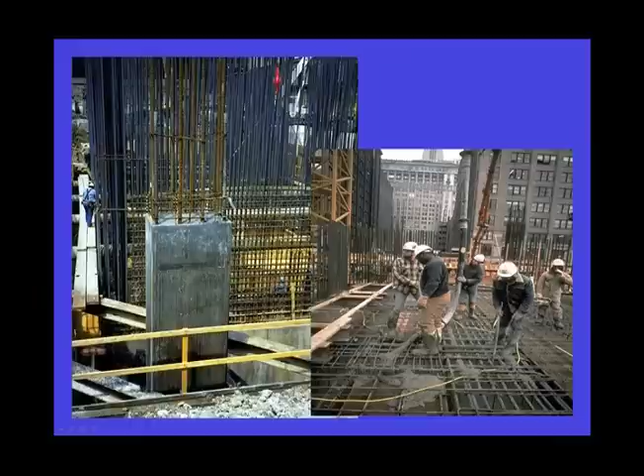We talked about high strength concrete in high rises and columns on bridges as one example of high performance concrete. In Seattle, all of the high rise buildings since '86 used to be all steel, and since '86 on they're all concrete.

What they do in Seattle is pretty ingenious. I don't have slides on it, but if you think of that last slide of reinforced concrete, this is what you typically see—steel inside the concrete, inside the form, because concrete is good in compression but not good in tensile.

Steel is just the opposite—it's good in tensile but not good in bending and flexural. So you combine those two properties together and you get a good column. What they've done in Seattle instead is use hollow formwork, hollow round tubes, 8-foot diameter, with no steel inside whatsoever.

They literally pump the concrete into the bottom of these steel forms and fill up the steel form. There'll be one floor in height, and they put another one on top of it—8 to 12 feet high. They fill all the concrete up, and the forms stay in place. So you've got this concrete column that's jacketed in steel.

You put pressure on that concrete, and that's great because concrete is great in compression, but like a ball, if you press it, it wants to squeeze—that's what happens when you break a cylinder. When you squeeze a concrete cylinder, if it fails right, you've got a cone on top of a frustrum, and the part in between blows out like a rubber ball.

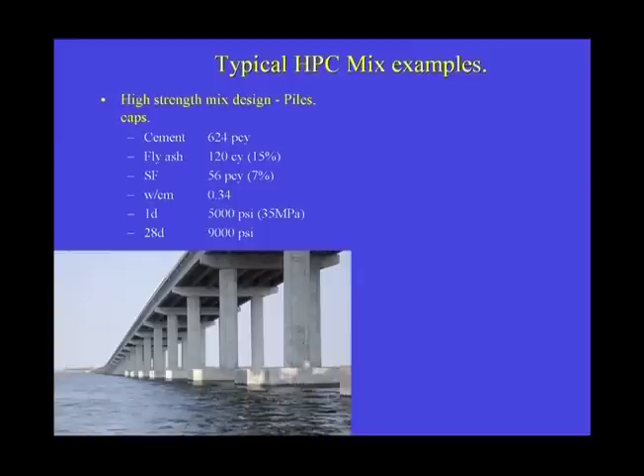Let's look at some high-performance concrete mix designs. Here's one used in piles in North Carolina. Everything there gets its aggressive chemical attack from the brackish water. So everything that's underwater, the concrete piles underwater, from here all the way up to the bottom of the bridge deck, is all high-performance silica fume concrete. That's where they're going to get their chemical attack.

They don't get freeze-thaw, they don't throw salt on top like we do up north—they get all theirs from down here. So from underwater all the way up to underneath this girder, from here on down, is all high-performance concrete. And this is the mix design that they used.

624 cement, some fly ash class F, and silica fume—we're talking about these two being pozzolan materials.

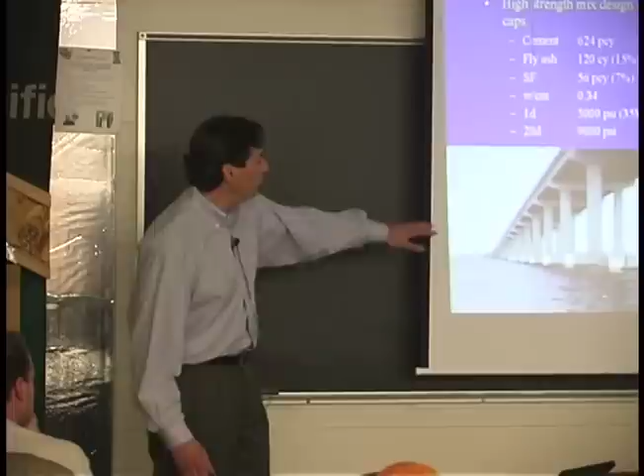And they still have to worry about all the sand and salt coming off the water from the winds, getting on top and eroding it. I think on the roadway they're depending on a washing action from rain to wash that off, whereas whatever hits this side here may not get washed off—that'd be 365 days a year, where we only put salt on for 3 months.

Excellent point, good point. That's what they do—in Florida they stop about halfway up, at 20 feet above the water. I mean, it's the same. Why? Every state's different in the way they do things. But that is a good point.

I know in parking garages, if you follow the American Concrete Institute guidelines for designing concrete parking garages, they say anything within a kilometer or two of the ocean should be treated the same—it has the same salt attack. Well, what's the difference between a garage deck and a bridge deck? I'm supporting what you're saying—they should use it all if they're this close to the water. They do in the parking industry. Why don't they do it on bridges? I don't know, they're just slow in coming around. But in this case, in the Carolinas, they take it all the way up. In Florida, they actually stop here.

They were looking for strength. In this case, besides low permeability, they were also looking for higher strength for load-bearing capabilities, so that's why they were pushing it. This is typically twice as strong as what you would use if you were just looking for a lower permeable concrete. Here's one from New York DOT.

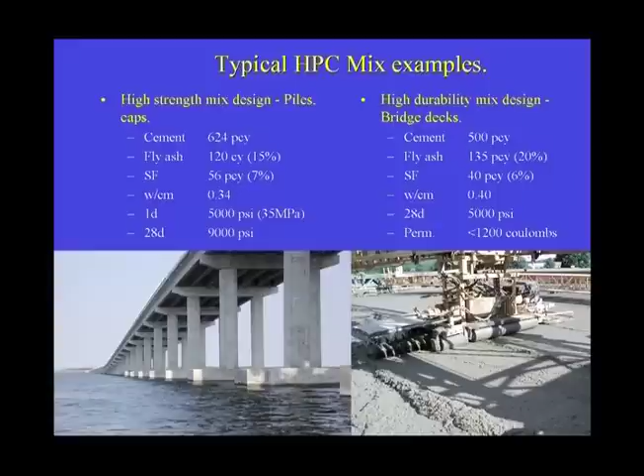Their actual mix is 500 pounds of cement, the same fly ash, some silica fume in there, and you see they're only making 5,000 psi. This permeability Coulomb number is a rating of the permeability of the concrete.

A little bit different in mixes. You can see the goal, the difference in the water-cement ratio, lower for higher strength, more cement and silica fume for higher strength. If you're looking for permeability, you don't need strength, so you can take a lot of cement out.

I've seen the lowest cement factor in Colorado. DOT actually has a high-performance mix design where they only use 390 pounds of cement per cubic yard, which if you go to Ferrier Brothers over here would probably blow their minds. They probably don't have a mix design that has less than 564 pounds of cement in any of their mixes. And they don't call it high performance, but yet in high performance, if you do it right, you mix the right materials together, you don't need that.

Now that you've heard me talk for an hour or so, you all know high performance concrete philosophy. You all play poker and everything else. Tell me what that card is.

Somebody says Queen of Hearts. Yeah, it's a Queen of Hearts. It's a Queen of Spades. I can't look at it either. I can say it without looking at it. If I look at it, I call it a heart too, but it's not. It's a queen of spades.

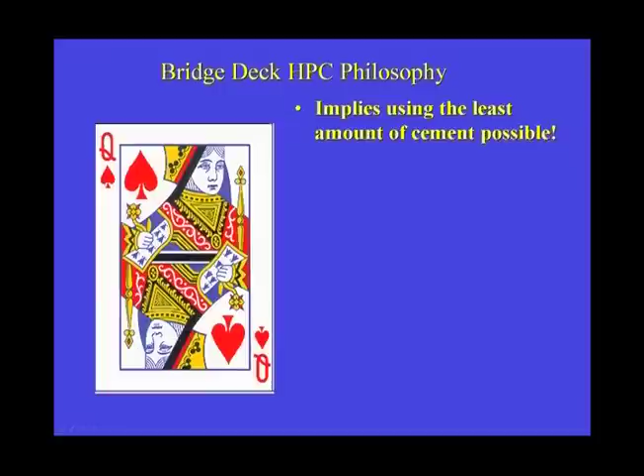And that's kind of what we're talking about with high performance concrete too. It's not the obvious. It actually means, if you use the technology, use the least amount of cement possible. Remember, we talked about the good actor and the bad actor in concrete. The aggregate's good, the mortar is bad. You want to use more aggregate and less mortar, but you want to make the mortar as good as you can possibly make it.

Using cement alone only makes it a certain goodness, but if you add pozzolans to it, then you can convert more of that inefficient byproduct of cement water hydration into more cement. What you get is particle packing if you're using silica fume, reduced permeability, and ASR control with fly ash and silica fume. If you use less cement, you're able to use less water.

And it's the amount of water in concrete that causes it to crack. You only need a certain amount of water in a yard of concrete to make concrete, roughly about 30 gallons of water. If you ever see any mix design that has more than 30 gallons of water per cubic yard, that extra water is only in there to make the concrete crack. And most people don't want their concrete to crack, so you don't need that extra water.

So one way to control cracking is to get rid of the water. Well, how do you get rid of the water? Get rid of the cement. We don't need all that cement in there anyhow, so everything kind of follows in line. Lower cement, lower heat of hydration.

When cement and water react together, that produces heat in the concrete. And if you have a differential temperature, like in those columns in New York or Chicago, those columns, when they cast them, may get up to 160 degrees temperature. If you have more than a 36-degree temperature difference between internal concrete and external, it'll crack from thermal shock just because of that temperature difference. So what they do is two things: they try to make concrete that doesn't generate as much heat, and then they keep insulation blankets wrapped around those columns so that they can keep the heat in.

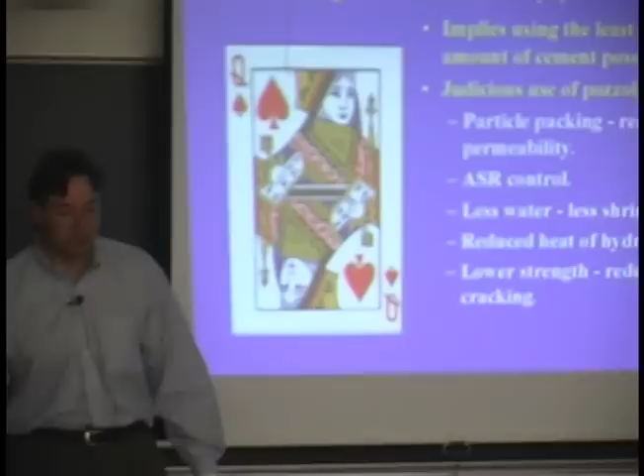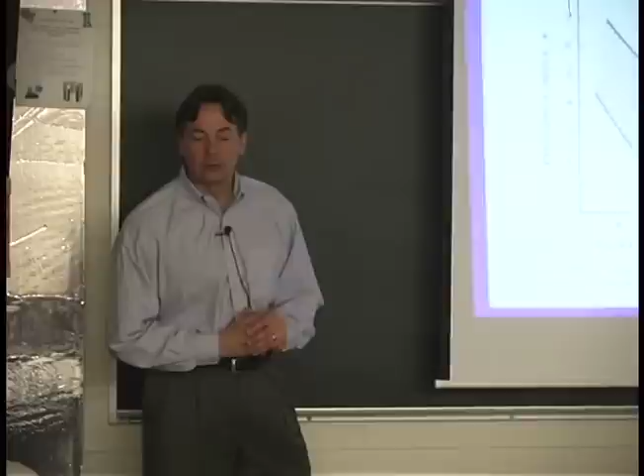One of the reasons silica fume allows you to use the least amount of cement possible is the replacement factor. Because of its fineness and chemical reactivity, a small amount — we're talking about a 5 to 10% cement replacement — can give as much as a 4, 5, or 6 times replacement factor. That means if you take out 100 pounds of cement, you can put in roughly 20 pounds of silica fume, a 5-to-1 replacement, and still get the same strengths. So you've gotten rid of some cement, gotten rid of water, and put in a material that can particle-pack and do other things in the concrete. Silica fume really helps drive that cement factor lower and lower.

This happens to be the Illinois Tollway mix on the Chicago Skyway Bridge, done about two years ago, in 2003. This was their starting mix design with a high cement factor of 665, some fly ash in there, no silica fume. The water, in gallons, represents the absolute volume that mortar occupies.

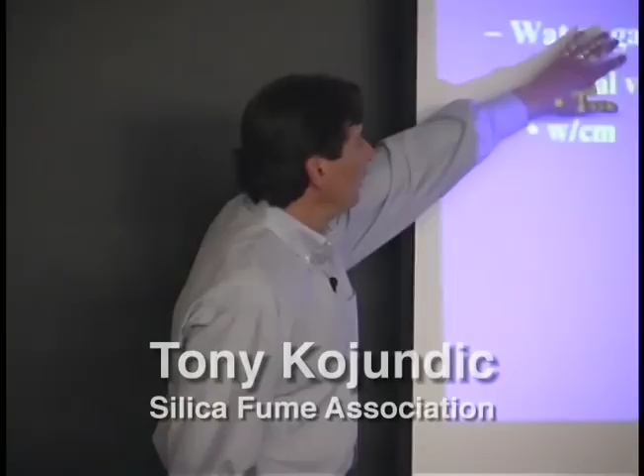You see what they ended up doing when they switched over to a high performance concrete: they took out almost 200 pounds of cement, fly ash stayed approximately the same, and they used silica fume here at 40 pounds. If you think about it, that 40 pounds reflects the 5-to-1 cement replacement we talked about.

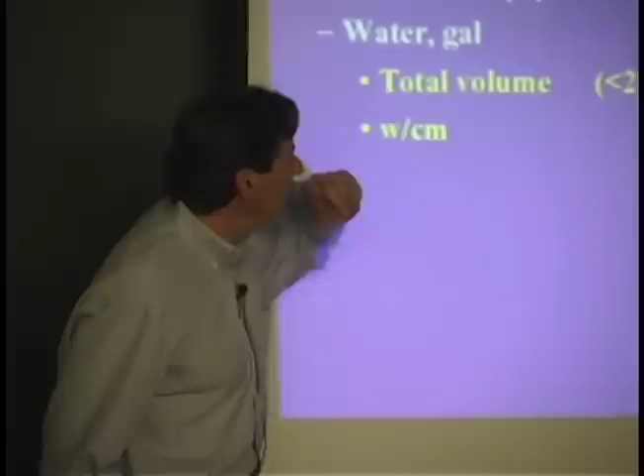They took out 200 pounds of cement and put in 40 pounds here. That's 5-to-1, basically. But when they lowered the cementitious materials, they're only 470, 570, 610 pounds of cementitious materials, and the water here is only about a 0.40 or 0.41 water cement ratio. We talked before about low water cement ratios.

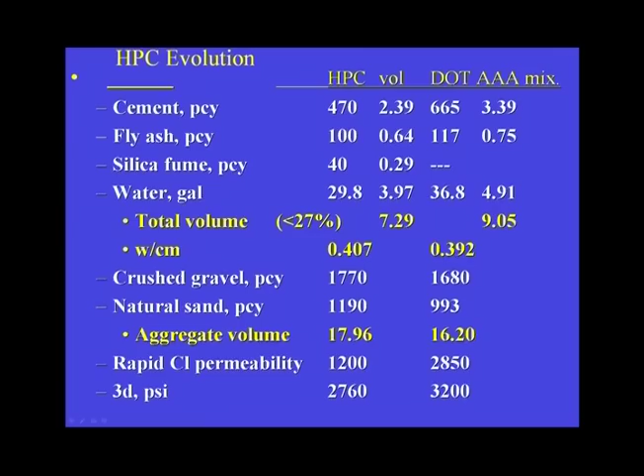Normally lower means better. In this case, their old mix was a little lower water cement ratio than this mix. You'd think this mix would not be as good following that technology, but what it shows is you're able to use more aggregate, larger quantities of the good material in your concrete. Permeability-wise, the high performance concrete is a lot less permeable.

At 28 days, the strengths are basically the same. At 3 days there's a little bit of lag here, but that's actually good for cracking on a bridge deck. When they ran this out to 56 days, the strength went up to over 6,500.

So they're actually talking about taking more cement out of this because they don't need high strength concrete on a bridge deck. The bridge deck is designed for 4,000 PSI, because when the trucks go over it, you want the bridge deck to bounce and flex. If you make the deck too rigid, it's not going to flex. So they're actually talking about getting rid of more cement to make a lower strength concrete.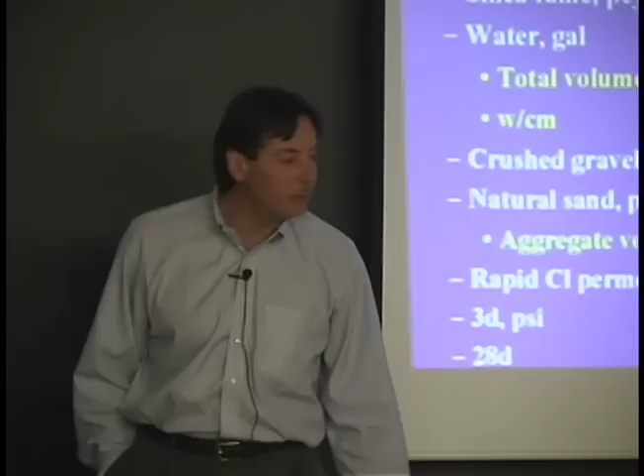In the case of Colorado, when they ask their ready mixers to supply a mix design, most people will give you a minimum - I want a 4,000 mix, I want a 5,000 mix, and you have to have a percentage of strength higher than that. In Colorado's case, they say I want a mix design that's between 5,000 and 6,000 PSI. They cap you - you actually make a mix design that hits that number. They don't test you during the project, but as you submit your mix design for approval for use on their structure, they make you hit this category.

They know that extra strength is easy, but it brings a lot of other bad things to performance if you make too strong a deck. They want it to be as low permeable as they can, but they also want it to behave like regular concrete.

From a construction standpoint, we've got a couple things that happen in concrete when we place it, and this is true for all concrete. We have various conditions on the surface of the concrete that cause drying - sunlight, wind, wind's probably the worst, humidity, moisture loss. There's always some type of evaporation going on, just like right here, right now.

In regular concrete, that's probably a good thing, because when you place it and strike it off, the first thing that happens is you get bleed water that comes to the surface. What happens is, when you place that fresh concrete, the concrete slowly settles, and as it settles, there's excess water in there.

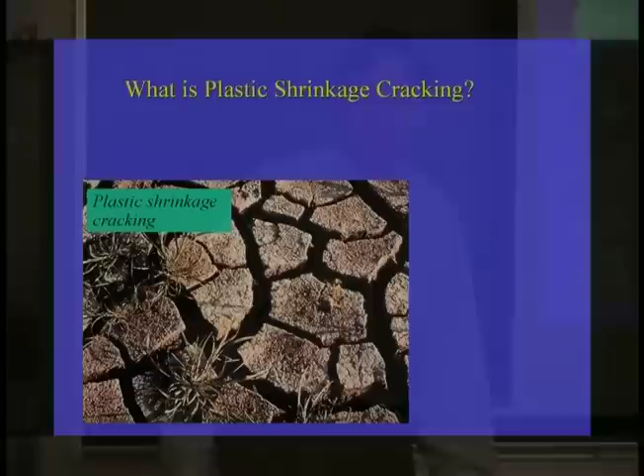It's called plastic shrinkage cracks. ACI says plastic shrinkage cracks. What is it? By definition, it's cracking that occurs in the surface of fresh concrete soon after it's placed or while it's still plastic. Two key things.

Fresh concrete, still plastic. Fresh concrete means when the time the concrete comes down out of the truck, it's fresh, it's movable, it's plastic. It only stays plastic for about 3 hours until it sets. The cement water hydration chemistry makes it start getting hard.

So plastic shrinkage cracking only happens in that first 3-hour window. If you can start developing strength in that concrete, you won't have plastic shrinkage cracking because it only happens while it's still plastic and still fresh. So we've got this 3-hour window that we need to protect the concrete from surface drying, but the concrete doesn't bleed, so why do we have to wait for 3 hours? If it doesn't bleed, let's just finish it sooner.

Well, let's cure it sooner. If we can cure it in 10 minutes time, then who cares how long plastic shrinkage may be in effect? We have it protected from drying. And that's kind of the way that the finishers have found.

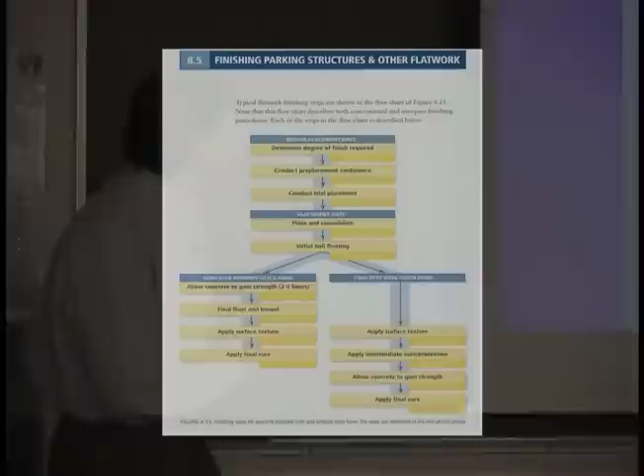This is a chart that's also found in the book looking at finishing parking structures. I'm not going to spend time on this. That'll take you through if you need it.

One of the ways to work with contractors on placing high performance concrete with silica fume without bleed water is, you know, you and I, we can stand here and be real didactic. I can tell you information and you can understand it and you can learn.

Some people can learn by see-do, like little kids. You show them something or follow me and they do it right away. Ride a bike, skiing, anything like that. They're good at see-do. Contractors, you're not going to tell them how to finish concrete and you're not going to show them because they've been doing this for 30, 50 years and they know how to do it, right? Even though they may be doing it the way they do with conventional concrete, not for high performance concrete, how do you get them to learn that?

And the way to do that is it's called guided discovery. I'll let you discover what I wanted to tell you in the first place, but I'll just guide you so that you discover what I wanted to tell you. You wouldn't have listened to me if I told you anyhow, so we'll go out and do a test pour for never-evers, contractors that have never ever worked with high performance concrete before.

A lot of specifications will actually require a test pour. And the engineer and the architect and the owner will come out and actually stand around and watch the test pour, watch everything happen, watch the contractor do his thing. But what happens is as the contractor's doing this test pour, he sees certain things. This is part of his guided discovery. He sees that, hey, this concrete, it's not as slumpy.

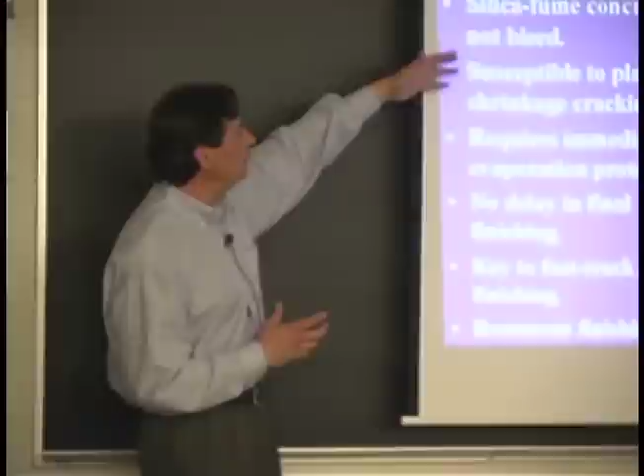You know, even though it said it was a 7-inch slump, this stuff kind of sticks together really well. It's not as slumpy as what it normally should have been. They pick up right away the fact that the concrete doesn't bleed. You strike it off and there's no sheen on the surface of the concrete.

So in various conditions, you actually leave part of the test slab out. Let it go bad, it's a test slab. Let them fail, let them see what happens if you don't do the right thing. Another way for them to learn. So there's part of this test slab we won't do anything to. We'll let them finish it the way they would normally finish concrete, just so they can learn themselves what works and what doesn't. Once they learn this has plastic shrinkage cracking potential, then they get into all these elaborate evaporative protection schemes.

If you go to American Concrete Institute, they have a whole list of different things you can do, from windbreaks, erecting a windbreak to stop evaporation, wind screens. They go into elaborate fogging, actually fogging, supposedly putting a mist in the surface, trying to create a higher humidity above the bridge deck to stop the evaporation from happening. They go to great stretches of describing what to do to try and stop evaporation. It's nature. You can't stop evaporation.

Deal with it. And that's what we're talking about here. Deal with it. There's no bleed water. If you can place the concrete and you can close the concrete surface, you don't have to worry about trapping any bleed water. Go ahead and do that.

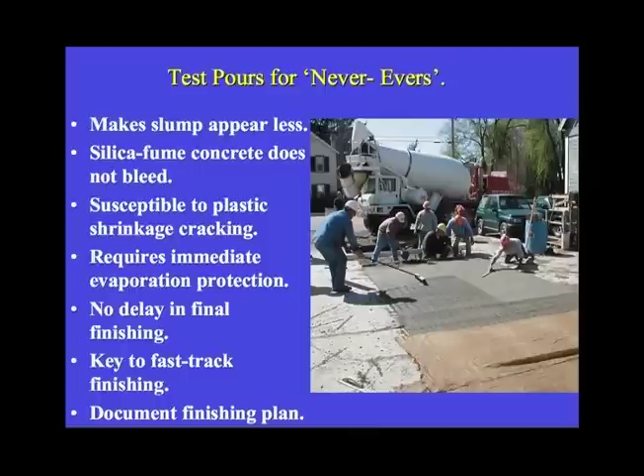It's this type, guys aren't used to that. These finishers are used to being around there till 8 o'clock at night finishing concrete that they should have been off of at 3. But that's what they do. It's a hard lesson for them to break. You guys can be the change agents. Make things change.

I use this photograph because when you ask for a test pour, this is what normally happens. The ready mixer gets a great slab in his yard, but this is a test slab for a bridge deck. And a couple things here. These aren't the finishers, these are the superintendents that are going to be there. So these aren't the guys that are actually going to finish the concrete anyhow. Secondly, this isn't the equipment.

They're not going to place the concrete on a bridge with a 2x4. They're going to use a big Bidwell paver, sophisticated equipment, all this stuff. They're not going to use a broom to texture it, they're going to have it tied onto the Bidwell. And they're not going to hand finish it.

So the only thing this is really accomplishing is they're seeing that there's no bleed water. You see there's no sheen on this concrete, no water on the surface. So they're placing it, finishing it, texturing it, curing it, go home. Ten minutes.

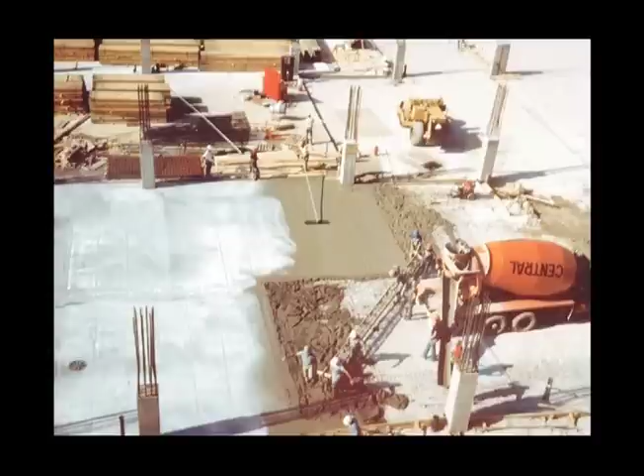If you do it right. On a parking deck - this happens to be Milwaukee Airport - this is slab on grade. They used the slab on grade as a test pour before they got up on the decks. They figured if they're going to make a mistake, do it on grade where we can yank it back out.

But they still used the bridge screed here, the paving screed, where that was used over there, they're bringing it over here now. Right behind the screed, they're hitting it with a float to close the surface. The float actually has a broom off the front of it, which I think I have another video or picture of. And then spraying it with curing compound.

This white pigmented curing compound is just that - it forms a liquid that, when it dries on the surface of the concrete, forms a film you can actually kind of pick off as a sheet. It almost forms like a rubbery film on the surface of concrete to keep the moisture in the concrete from evaporating.

This is another shot of finishing a parking deck. Indianapolis Airport is building a 6,000 car parking deck starting next month. Silica fume concrete is in the specification. All these videos and user manuals and everything the local contractors are all going through right now to learn this technique: where they place it, close the surface, texture it, cure it.

They're pouring it off in strips. You can see how they're going, the individual strips going across the deck. Once they get down to the end of the deck, they're done - it's being finished and cured right here. They never have to get back onto this.

Even though you can't walk on this concrete, it's still considered fresh. The old way of finishing, you'd still get on this concrete and work it later on. This stuff is still fresh, but it's done - it's finished, there's nothing left to do with it.

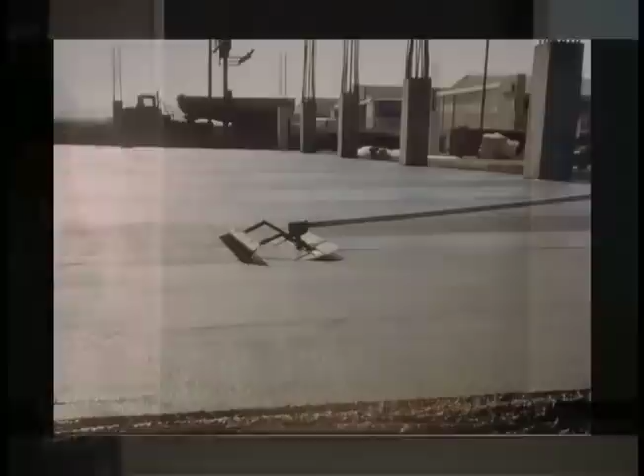Here's the broom. They actually invented a tool when we first started because of the non-bleeding concrete. You can see there's no shine on this concrete. They use a tool called a Fresno - it's a steel trowel. A lot of guys that work with concrete use a lot of wooden tools, wooden floats, bull floats - really good for consolidating aggregate with conventional concrete.

But because this stuff is real tacky, a wood float will just kind of pull and tug at the surface. Instead of closing the surface, it'll actually rip it back open again. This concrete without the bleed water is very sticky, cohesive and adhesive - it'll stick to everything and to itself. So if you start pulling it, it'll have a tendency to want to rip apart. So they have to close the surface with this steel trowel, which works very well, and then put a texture on it.

If I'm going to try and reach out there with the broom and put a broom texture on, it's crazy because you can't balance it 30 feet out without it smacking into the concrete. The guy says, I'll just attach it - and the contractor actually made this - he attached the broom off the front of his Fresno. So when he pushes this tool out across the concrete, this edge of the blade is in contact.

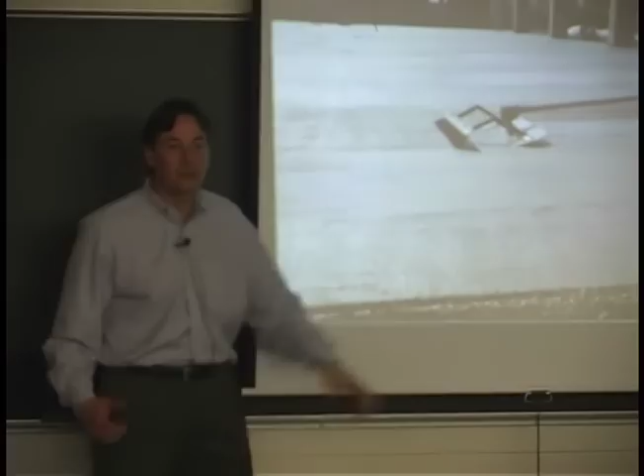Everything is tilted this way, so this actually rides in the air. As he's pushing the bull float out across the deck, the broom rides in the air. When it gets to its furthest point, he turns what's called a hustler joint, which changes the angle of the blade from this angle to this angle, thereby lowering the broom onto the deck, and he pulls it back towards him. He not only closes the surface but puts a texture on at the same time - two steps in one. The next guy sprays it with curing compound, and they go home.

Without the curing compound, or without curing immediately, this will crack. It's like, give me a piece of paper and let me guarantee you it will crack now so I don't get the phone call. If you don't cure it, it's going to crack, because there's no bleed water here. I mean, it's physics. It's going to crack if you don't do the right steps.

Some of the right steps they've found, particularly on bridges, is placing them more at night. There's less traffic at night, it's safer without traffic on the highways, but it's also a lower temperature at night.

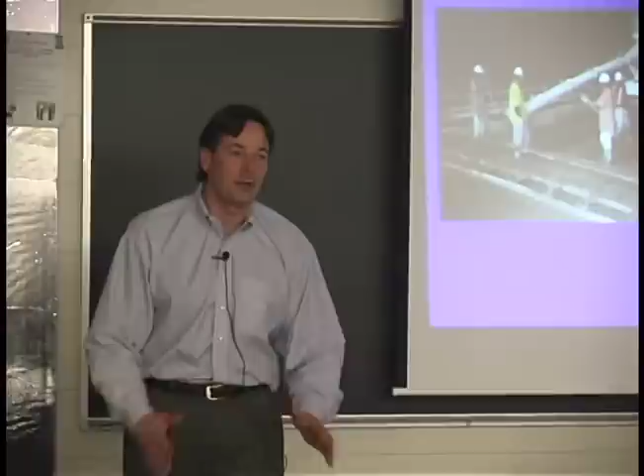If you place concrete at night, 6, 7, 8 o'clock, it starts getting hot at 3, 4, 5 o'clock in the afternoon. Well, that's fine, that's the hot part of the day, so everything climbs together. It's not the fact that the concrete gets hot, it's this coefficient, this difference in temperatures between the outside temperature and the concrete temperature that causes cracking.

So they place a lot of bridges at nighttime, lower temperatures at night, reduced temperature differentials.

They also have a tendency to place it at the lowest slump possible. Slump is what you see in the video where they pull the cone up, the concrete falls, and they measure how much slump that is.

When you have a very high slump concrete poured over steel, sometimes that concrete, because it has so much flow, will have a tendency to settle over the reinforcing bars. The reinforcing bars act as stress risers and actually cause the concrete to crack as it settles around the reinforcing steel. So if you take some of that slump out, the concrete can support itself better - lower slumps are better for reduced cracking.

This stuff you can't over-vibrate, it won't segregate. And as we said before, early finishing was better than excessive hand finishing.

All the curing practices found to date show you should immediately cure it with water, at least for 7 days - wet burlap, those type of structures.

When you're doing multiple long span bridges, normally if you have a single span bridge - one column here, one column here, crossing the interstate - you go in one continuous span, starting pavement on one side and going in one complete motion to the other side of the deck. If you're doing viaducts, like up on 294 in Chicago, where you have long continuous spans, maybe a mile long, elevated over someone's backyard, not even a river - it's still a bridge, but you can't place those straight through from one end to the other.

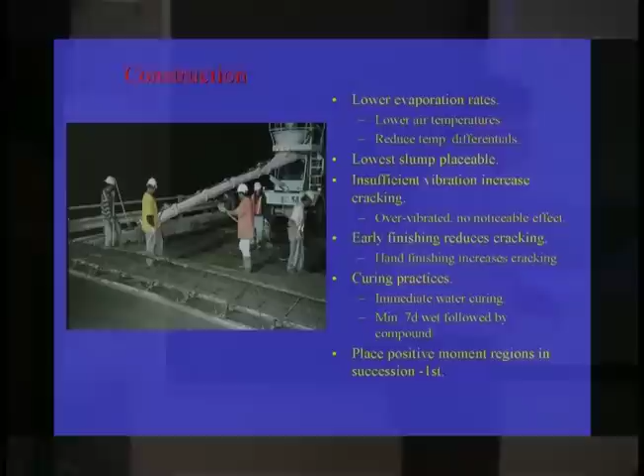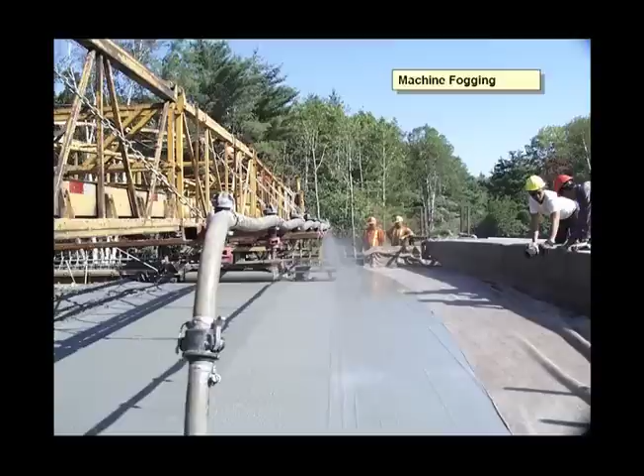I see engineers that go into great detail: 'Oh, plastic shrinkage cracks, we've got to stop plastic shrinkage cracking. I have to fog the concrete, I have to create this humidity.' So they go to great extents putting in elaborate fogging machines and spending money. It's wasted. First, you're not supposed to spray the water down directly onto the surface of the concrete—it's supposed to be raising the humidity of the air above the concrete. You might as well just get a garden hose and spray it on the concrete.

Secondly, if they were prepared to put the curing on, they don't have to texture this—they're going to come back and saw cut it later. If the contractor was prepared to put the wet burlap on this close to the paver, what good's this doing? He already has it under cure. This is useless. He just spent all that extra money to do nothing. If he did the right thing first, which is what he's doing, he doesn't need the fogging machine.

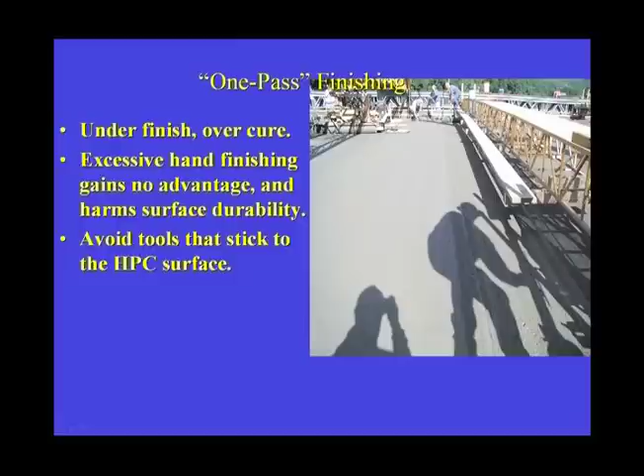Plus he's placing it in the morning, but he's got the cure on right away, so that's good. People spend so much money on fogging, and it just doesn't make sense if you can place and finish it properly. Here again you see it: the Bidwell's placing it, this guy's texturing it, here's the wet burlap under there, 10, 15 minutes behind. There's not a fire drill going on here, the guys aren't overworking—this is an easier job all around.

I don't like tools that stick to the surface. We said that wooden tools will stick and tug at the surface of silica fume concrete. Steel tools work best. This is what a texture looked like.